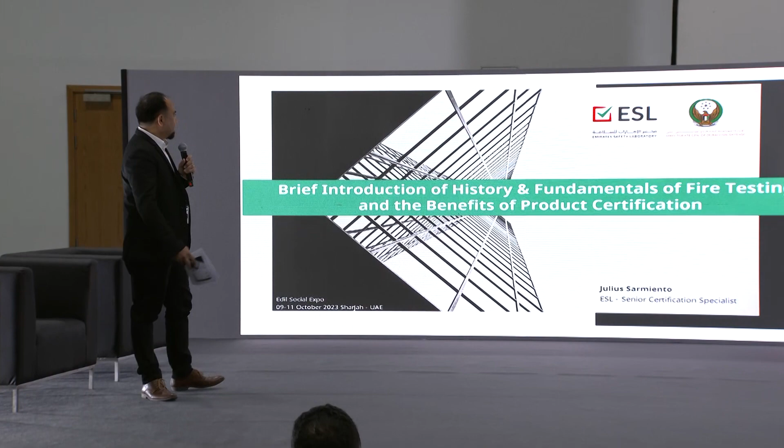So, my name is Julius Sarmiento. I am a senior certification specialist in ESL. I have over 18 years experience in the building industry, especially in the construction industries, and 5 years of which I work in the fire and life safety sector, and I'm now 4 years running in certification in ESL. So today I will speak about a brief introduction of the history and fundamentals of fire testing and the benefits of product certification.

So what is fire? Okay. I hope that it's okay that I'll just read some of my notes because it's more informative, yeah?

So all of us here have first-hand experience with fire. In our everyday life, fire is always there, like for cooking, for production of energy, as well as in the manufacturing industries. Fire is the process of combustion when the four elements of fire are present, and that makes a chemical chain reaction.

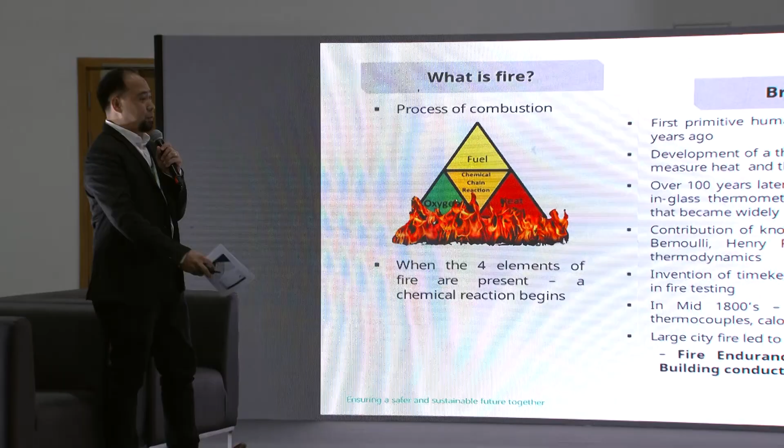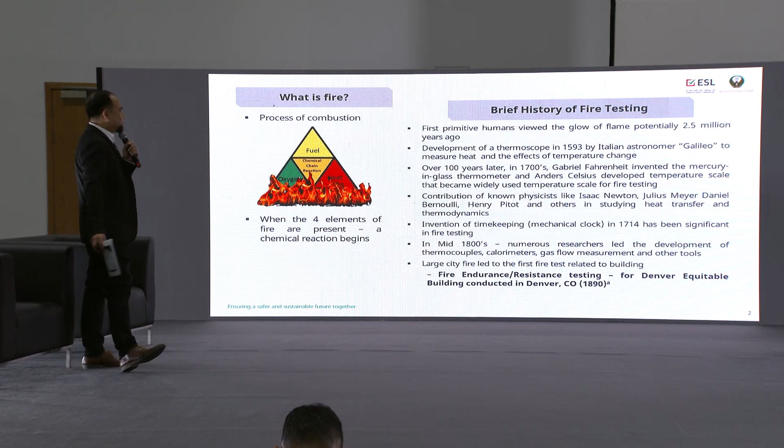So let's just have a brief history of fire testing. The first primitive humans viewed the glow of flame potentially 2.5 million years ago. But even before that, there's evidence of fires caused by lightning and the heat of the sun. The development of the thermoscope in 1593 by Italian astronomer Galileo is the main significant change, when he invented this to measure heat and the effects of temperature change.

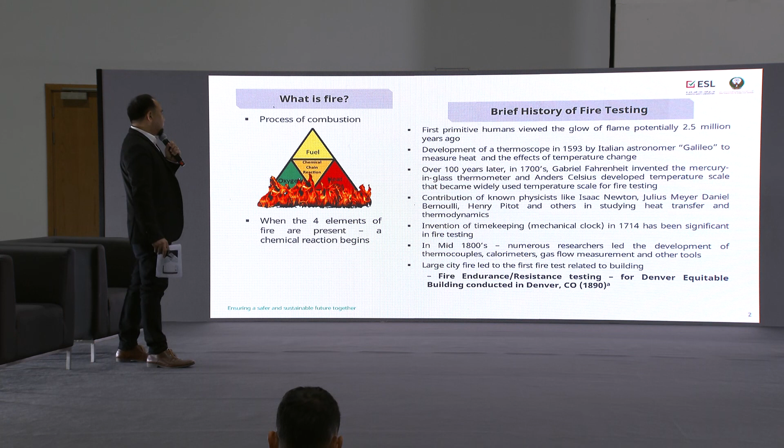And over 100 years later, in 1700, Gabriel Fahrenheit and Anders Celsius developed temperature scales that became widely used for temperature measurement for fire testing. And the contributions of known scientists like Isaac Newton, Bernoulli, Pitot, and others who studied heat transfer and thermodynamics became a significant factor in measurement and tools development.

And in North America, large city fires led to the first fire tests related to buildings. The first fire test happened in Denver, Colorado, which involved fire, load, and shock and water testing.

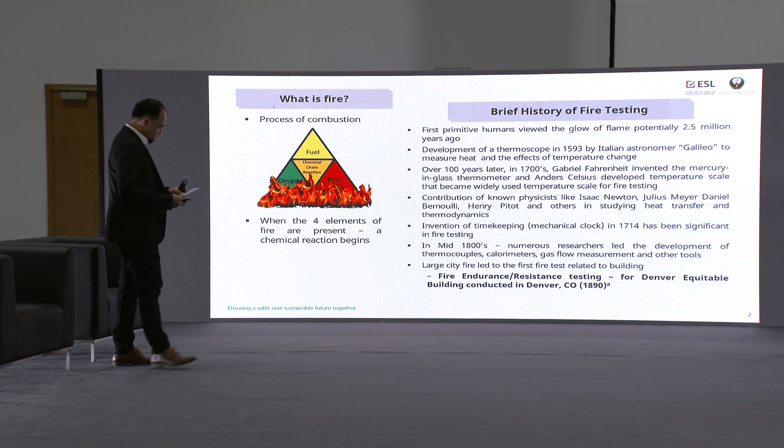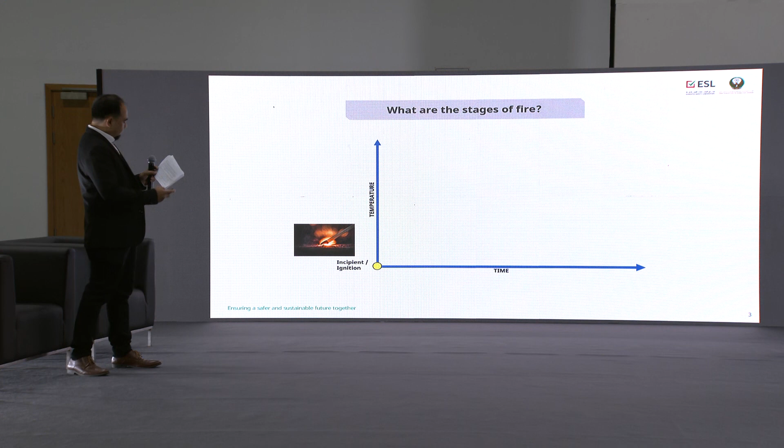So when we talk about fire breakouts, it should be understood that fire progresses in several stages. It starts with the ignition, or the incipient stage of the fire. This happens when the combination of oxygen, fuel, heat, and chemical chain reaction happens. The next stage is the pre-flashover, or the growth, where the process of combustion continues growing and more combustible material contributes to the fire load, making the fire increase rapidly.

Next is the flashover. This flashover happens when the temperature reaches 600 degrees Celsius. This is when it is advisable that there should be evacuation, because no one survives flashover. So the next one is the fully developed or post-flashover stage. This is when the fire has already reached its maximum and there's no more to burn. So it's the largest and it reaches over 1,200 degrees Celsius, which is very catastrophic.

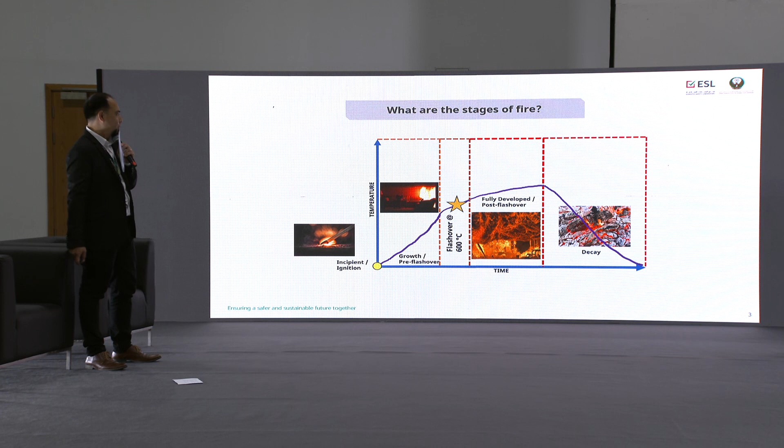And the last is the decay. Decay is when it's completely burned and there's nothing left in the combustible material to be combusted or to burn.

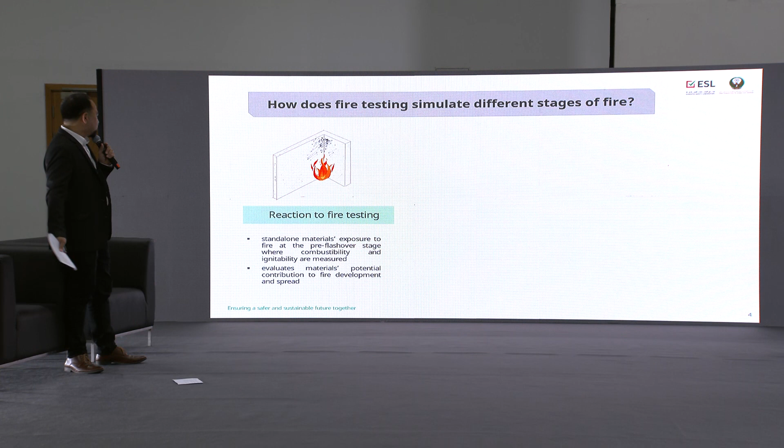So how does fire testing simulate different stages of fire? Reaction to fire testing. This is the standalone material fire testing. So basically, products are tested as a standalone in an exposure which is equivalent to the pre-flashover stage, where the combustibility and ignitability are measured. It also evaluates the material's potential contribution to fire development.

When a fire reaches the fully developed or post-flashover stage, it is important that building elements such as walls, columns, beams, floors, and other non-structural or structural elements of the building be tested for their capability to resist fire and prevent fire spread.

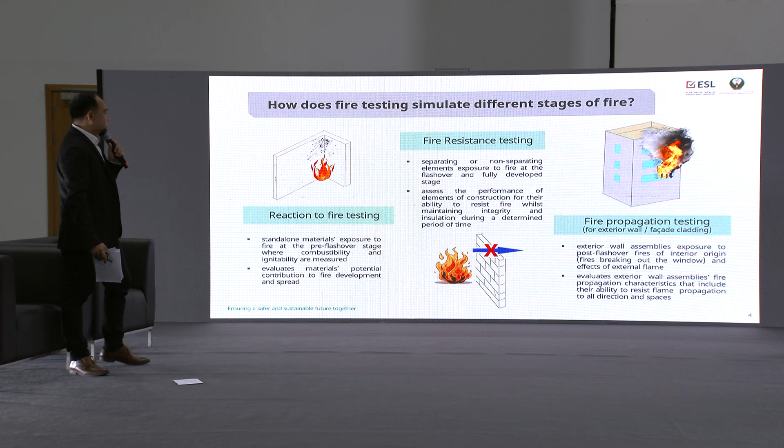Next is the fire propagation test. So this actually applies to exterior wall facade cladding. It's mainly the exposure to post-flashover fires of interior origin. So it's like the fires breaking out of the window and the effects of external flame. So it evaluates external wall assemblies' fire propagation characteristics, including their ability to resist flame propagation.

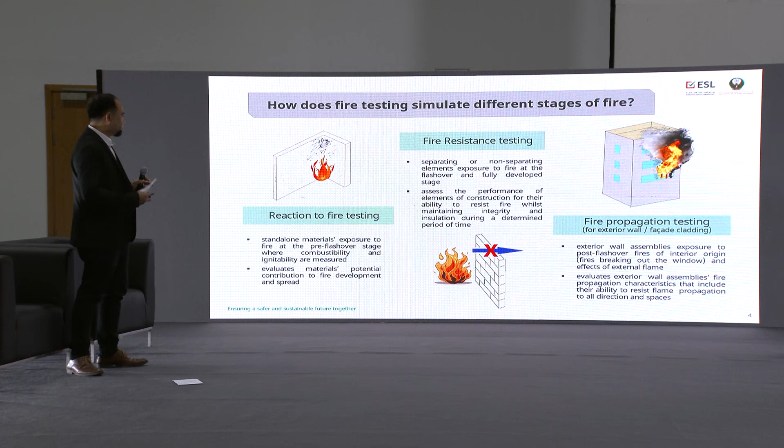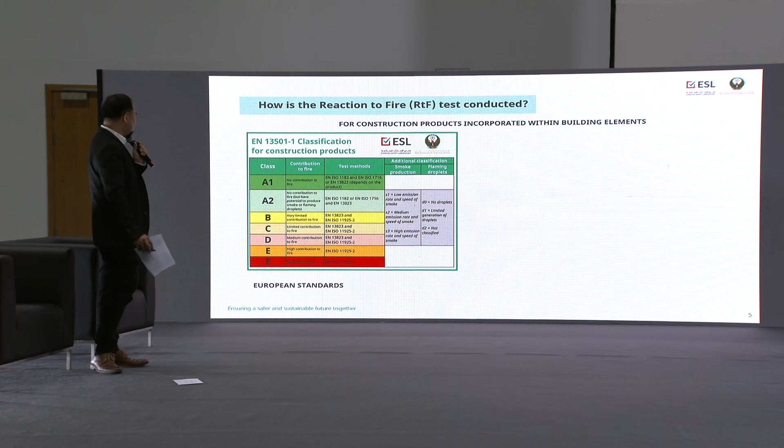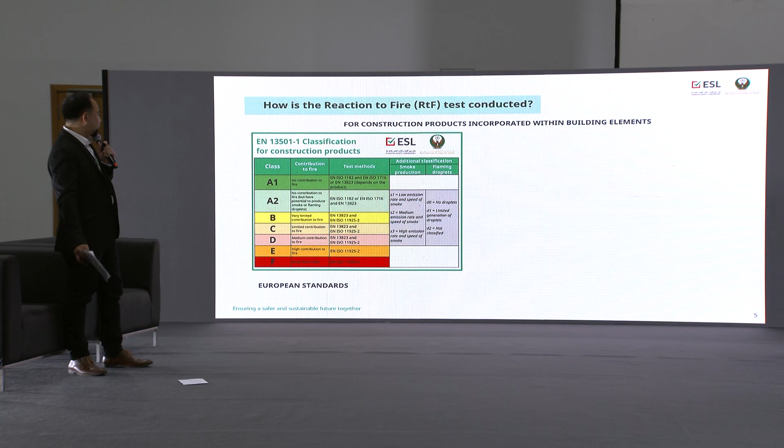So how is the reaction to fire test conducted? So the most common method is EN 13501-1, the European standard, which classifies a product based on the tests it has gone through. So in EN 13501-1 there are test methods that are followed.

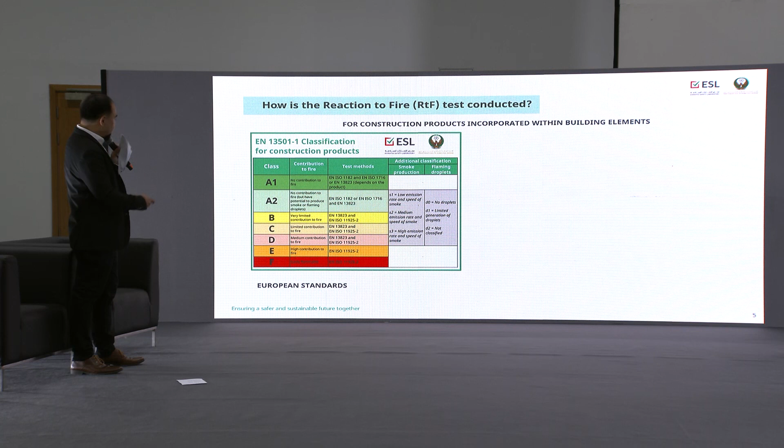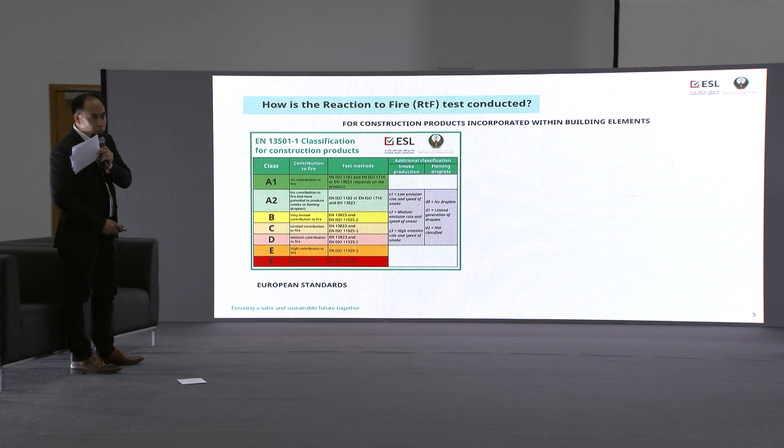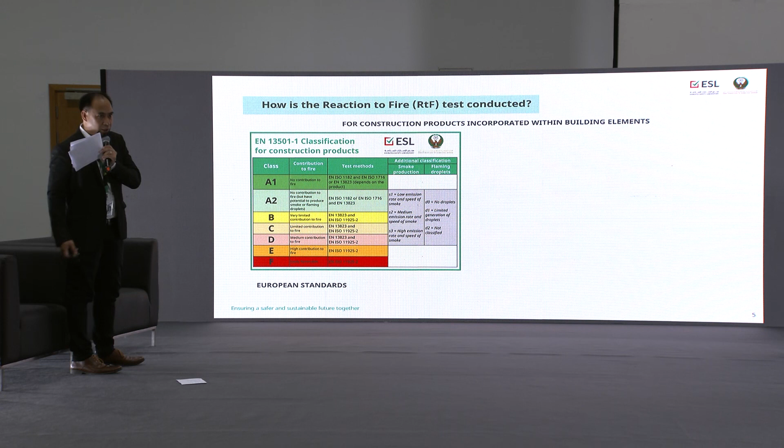But as you can see in the table, construction products are classified into each type of class. From A1, which is what we can say the best class, which is non-combustible, up to F, which is the worst class, which is easily able to spread flame or to contribute to fire.

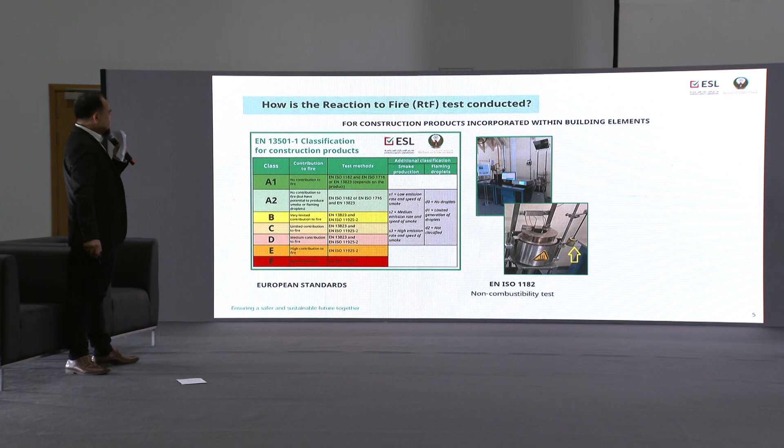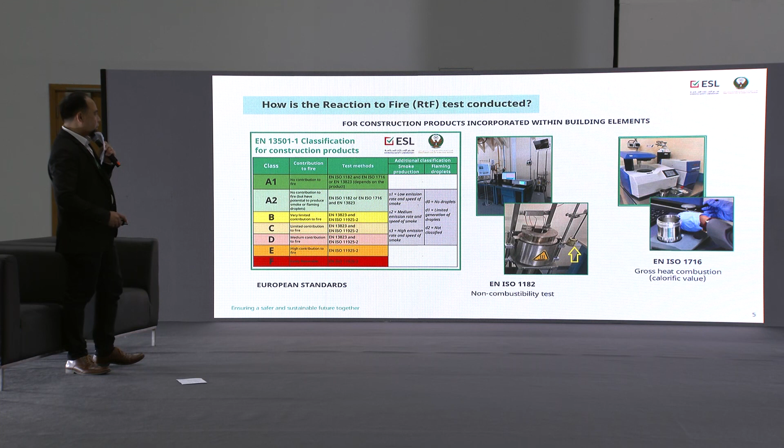So next, as I said earlier, for this standard, EN 13501, there are test standards that are used to test the product material. First is EN ISO 1182, which is the non-combustibility test. So in this test, a representative sample reduced to a size of 45 mm diameter and 50 mm thick is inserted in a furnace and then exposed to a 750 degrees Celsius temperature.

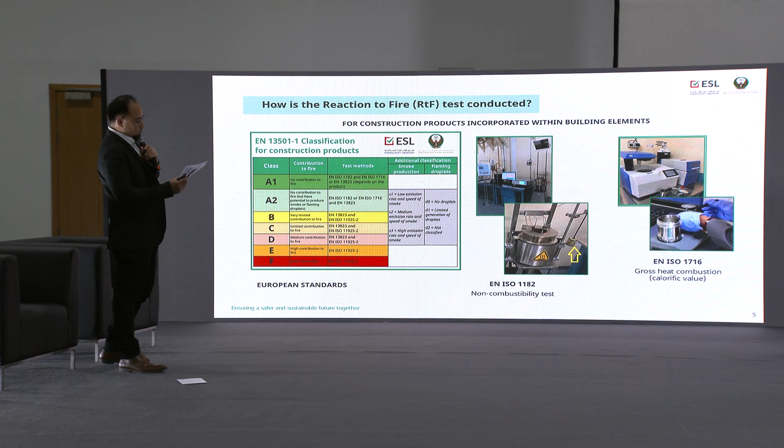The next is EN ISO 1716. This is known as the bomb calorimeter, where a specified mass of product is placed in an apparatus, which determines the gross heat of combustion, or the calorific value, of the material.

Next is EN ISO 11925-2. So basically this kind of test is a small ignitability test. It's like a lighter that exposes the product inside this enclosure, and it measures its ignitability with flaming droplets.

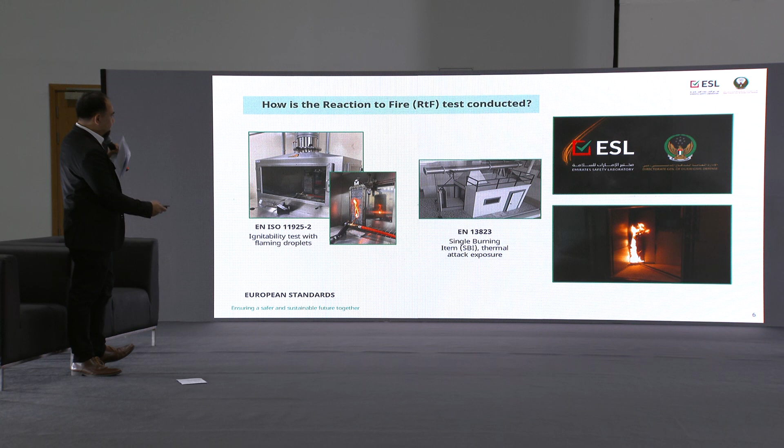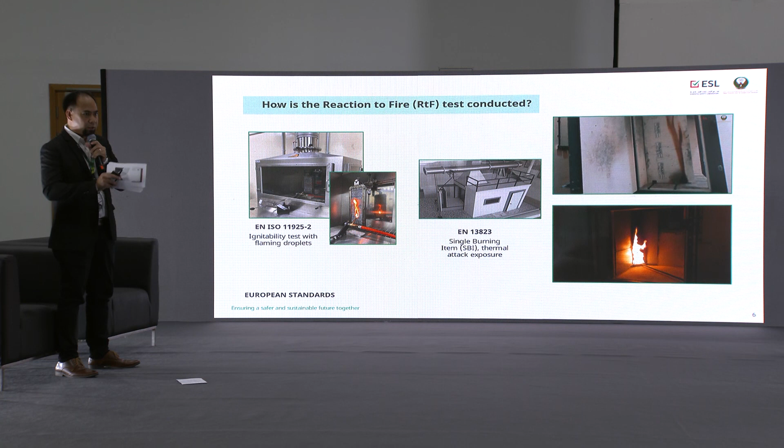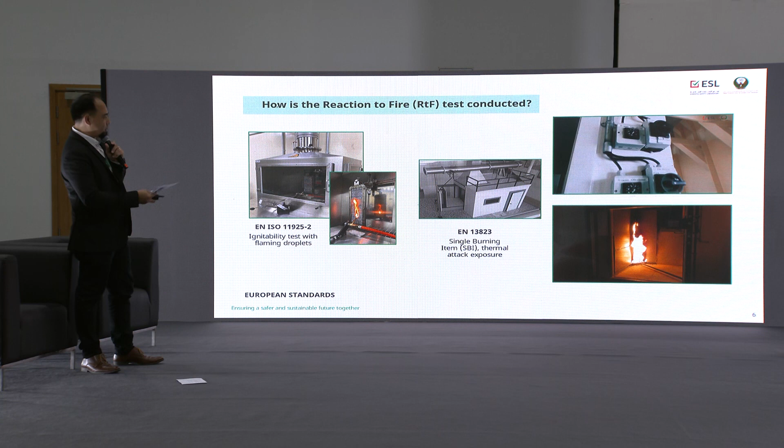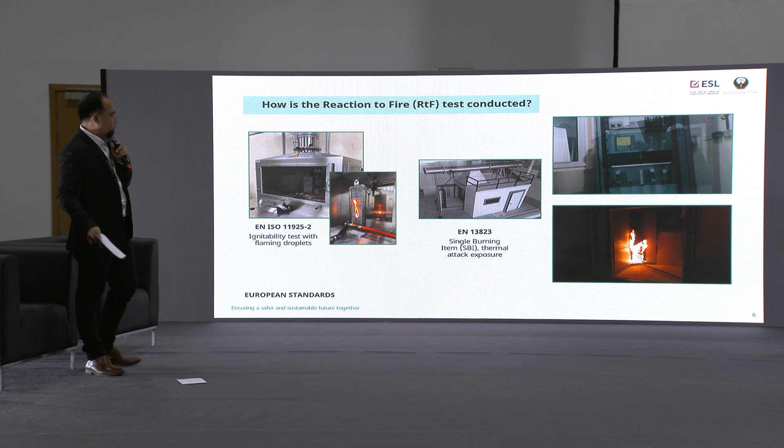The next is the EN 13823, also known as single burning item. As you can see from the video on the right side, this is how it is tested. It's like a room fire that is used to test and check the flame spread and also the smoke production of the product, especially for interior materials like wall finishing and ceiling finishing. It is also used for products used for facade cladding, like aluminum composite panels and other materials.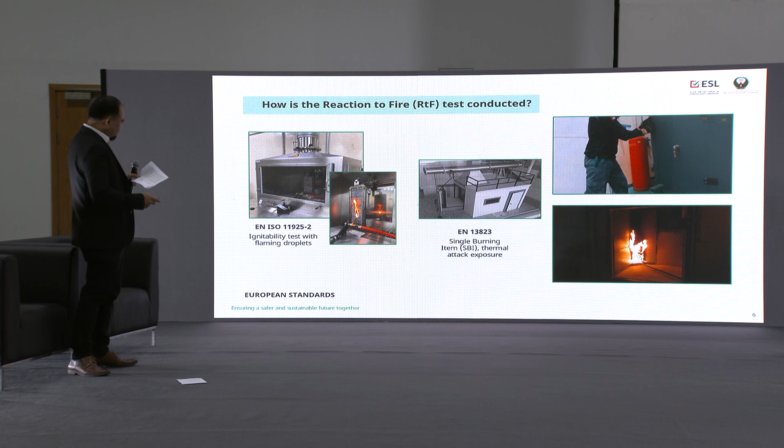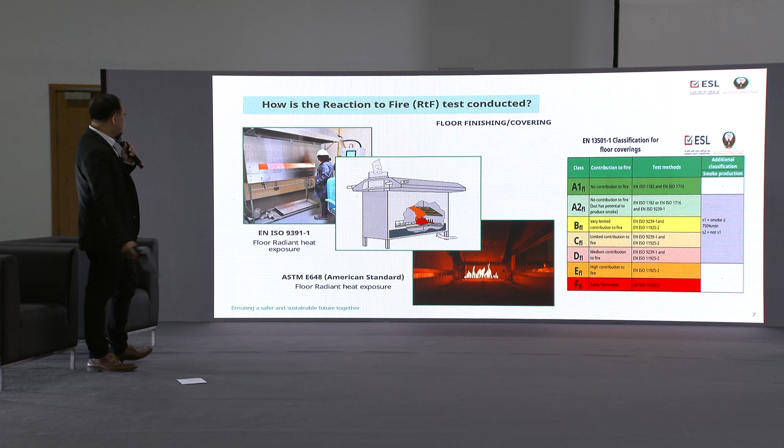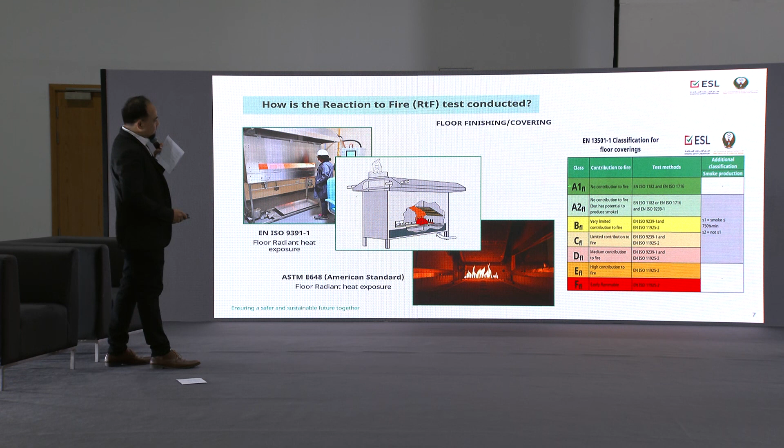Next is the EN ISO 9391, or I have to correct myself, it is 9239. This floor radiant heat exposure is usually used for floor finishing products. It is the test used to expose floor-mounted products, especially carpets, vinyl or other types of material used in flooring. It also measures the flame spread as well as the smoke production. Similarly, it is also under EN 13501-1. However, the classes are appended with FL, meaning it is for floor use.

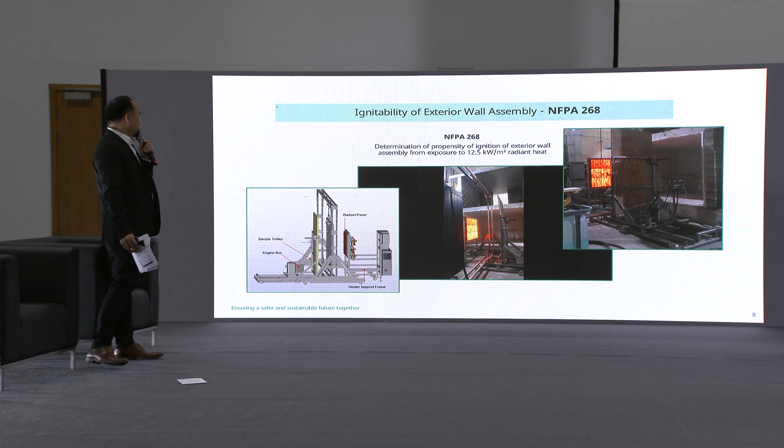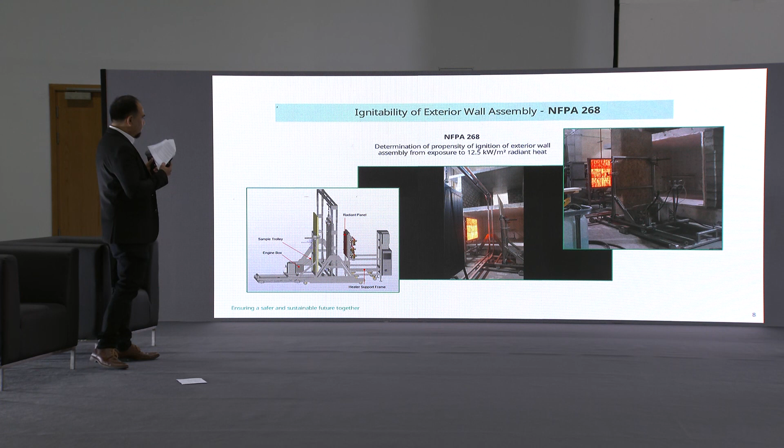Next is NFPA 268. This is the ignitability of exterior wall assemblies, to determine the propensity of ignition of an exterior wall assembly from exposure to 12.5 kilowatts per square meter radiant heat. Basically, it resembles the situation when there is a fire in a nearby building, and how an exterior wall assembly would perform under the radiant heat of the external fire. You can see in the video how the test is conducted: this is the product and this is the radiant heat, as you can also see in the image on the right.

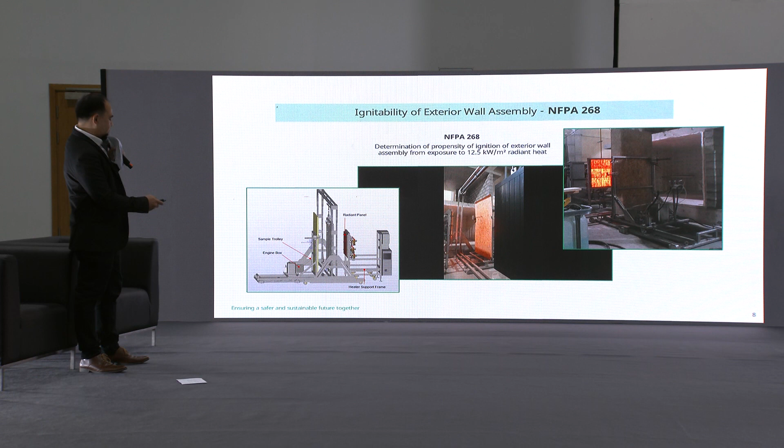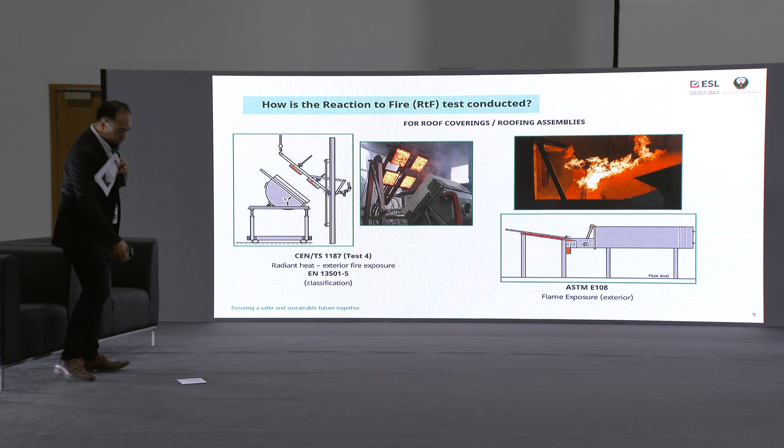Next is roof coverings and roofing assemblies. This type of testing is used for roofing materials like sandwich panels, shingles, or even solar panels used on the roof covering. CEN/TS 1187 is the European test method used for testing roofing materials. It has 4 types of tests, test 1 to test 4, but test 4, which is radiant heat and burning brand, is the one recognized by the UAE Fire and Life Safety Code for testing roof covering products. In the American standard, the counterpart is ASTM E108. The roofing material is exposed to flame as well as wind, and the flame spread of the product is measured.

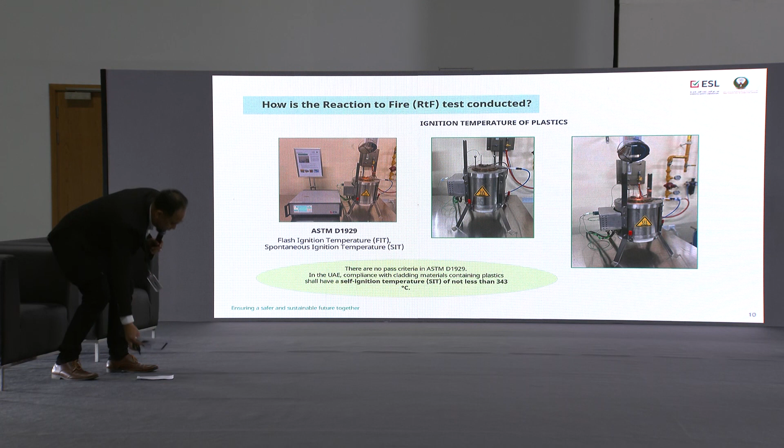Next is ASTM D1929. This is a test for materials that contain plastic. It tests the flash ignition temperature and spontaneous ignition temperature. There is actually no pass criteria in ASTM D1929. However, what the UAE Fire and Life Safety Code considers for compliance of cladding material is that it should not ignite at a temperature of 343 degrees Celsius or lower. This test measures the temperature at which the material with plastic will ignite, and whether it reaches the acceptable temperature.

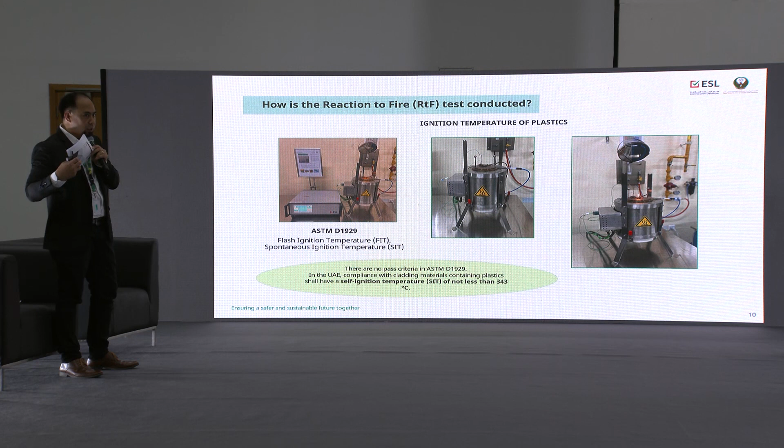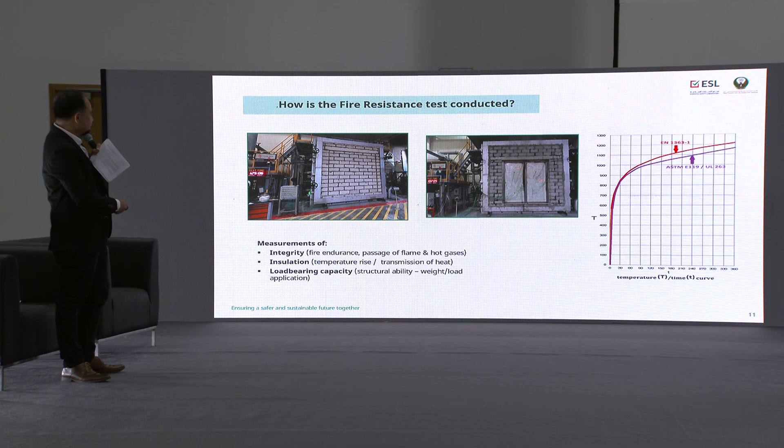What you can see from the outside is the unexposed side; what is tested is behind it. Behind it is the furnace producing over 1,200 degrees Celsius, as well as pressure inside, depicting a room fire. Not only walls, floors, beams or columns are tested for fire resistance. Other services like fire-rated ducts and systems like penetration seals and linear joint seals and sealants are also tested, for their integrity, insulation, and, where required for beams, columns and floors, load-bearing capacity.

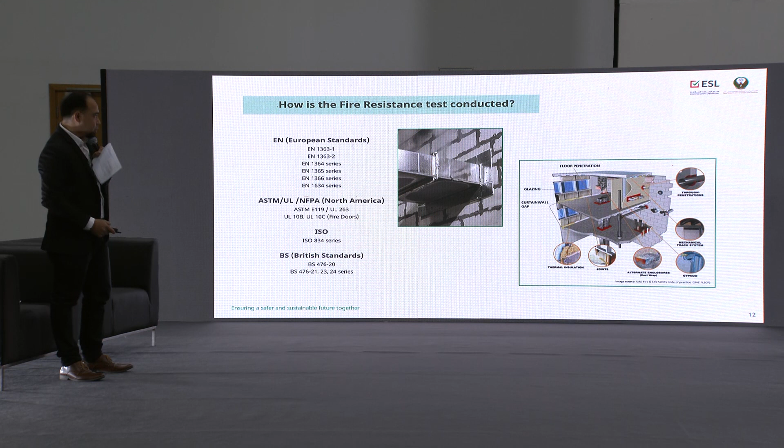So next is the fire propagation test. How is it conducted? This test is for evaluation of fire propagation characteristics of exterior wall assemblies, basically for the cladding materials or cladding systems used for buildings, like aluminum composite panel, GRC or glass reinforced concrete, and EIFS and other types of combustible cladding systems.

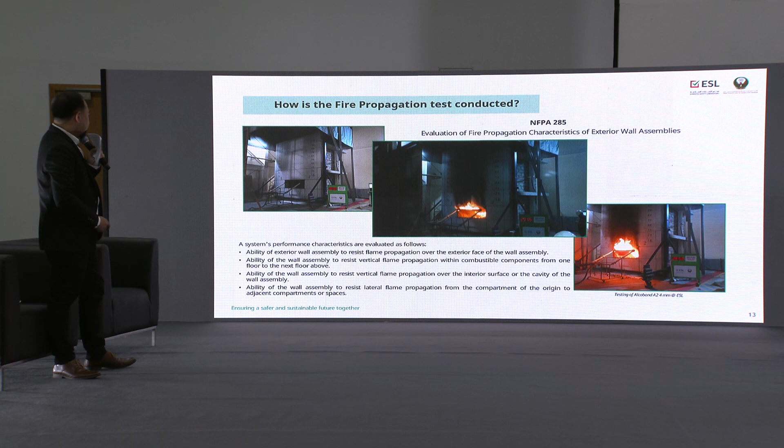So what you can see from the video is a sample test of fire propagation test in our laboratory. The sample material here is the ACP, which has a classification of A2 in EN 13501-1. This type of assembly, which is around 18 feet high and 13 feet width, is tested and evaluated for the ability of the exterior wall to resist flame propagation over the exterior wall, as well as ability to resist lateral and vertical flame propagation in the interior and in the cavity of the exterior wall assemblies.

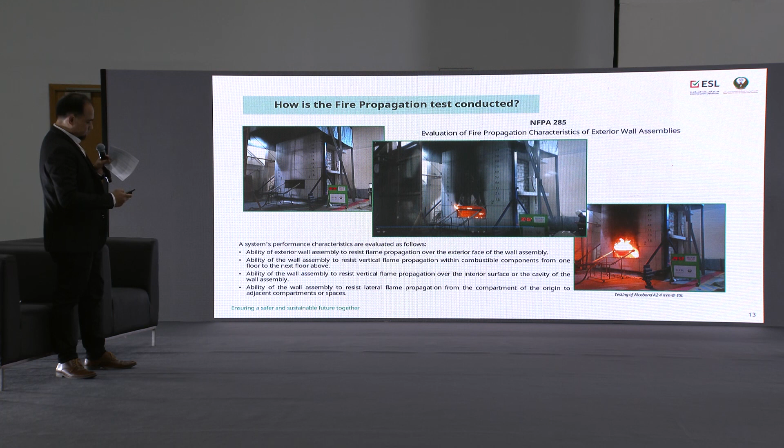So what is product certification and how important is it? We discussed a while ago about the fire testing that is required for building products and building systems, like different systems from the inside, like floors, walls, beams, and also for external building construction elements like facade cladding, roofing, even solar panels and other construction materials that are necessary to be tested, so as to avoid or prevent more fire load when there's a fire. So this is basically the aim of fire testing.

But what is product certification? The aim of product certification is to have confidence in the production of materials, especially when the quality management or quality procedures are being checked during product certification. Next is the consistency of the product manufactured as compared to the tested material. And lastly is the impartiality, which is ensured during the process of certification.

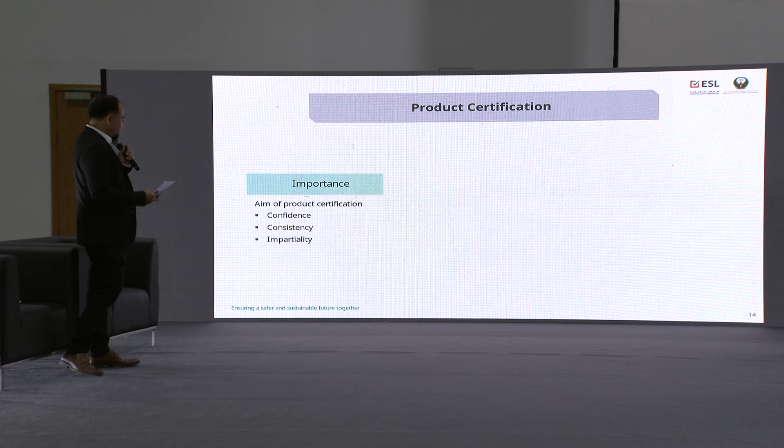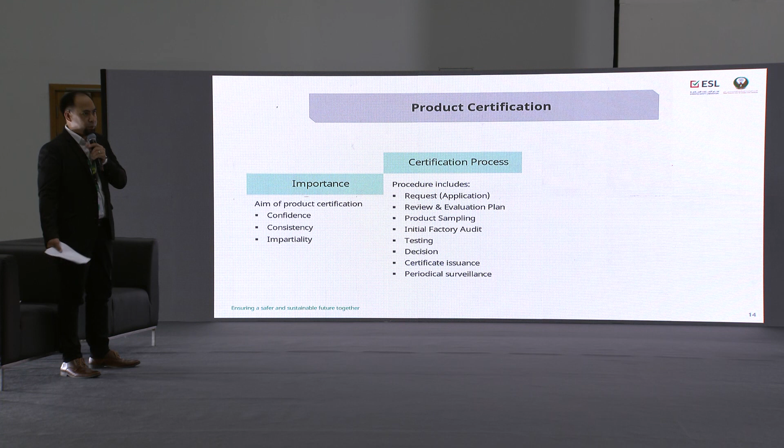Next is the certification process. Basically, the certification process is an intensive process. However, it's so sustainable that it helps more manufacturers to have value in their products that are being marketed not only in the UAE or GCC but the whole world.

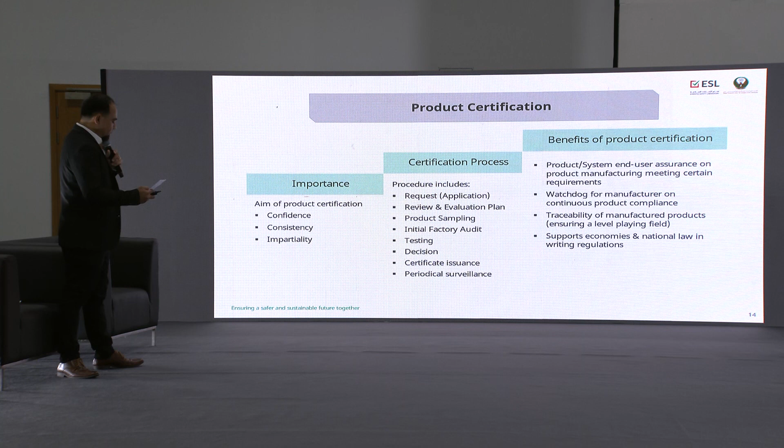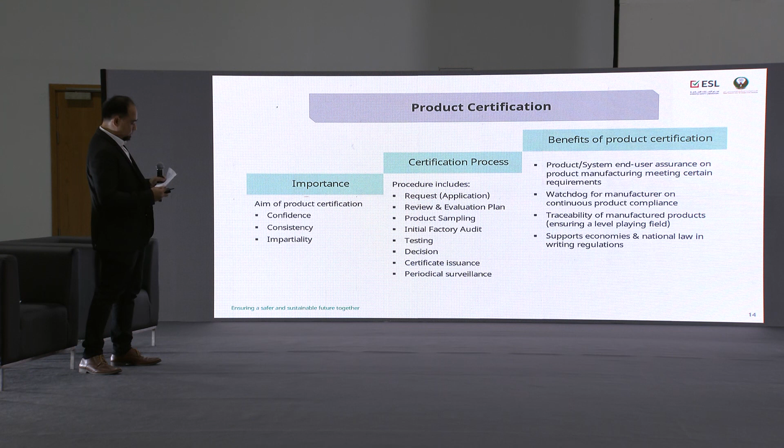Next is how the certification process happens. First is the request. We receive the application from the manufacturer or from the local partners of the manufacturer, or from the traders, or from the agents of the product.

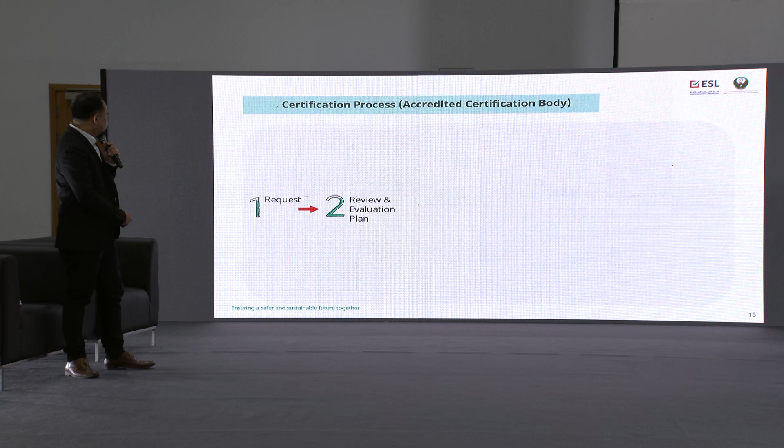Then there's a review and evaluation of the documents submitted. For example, for one product that wants testing and certification, we evaluate it in a sense of what end use it will be used for, and also what market is the target for the manufacturer to enter in different regions.

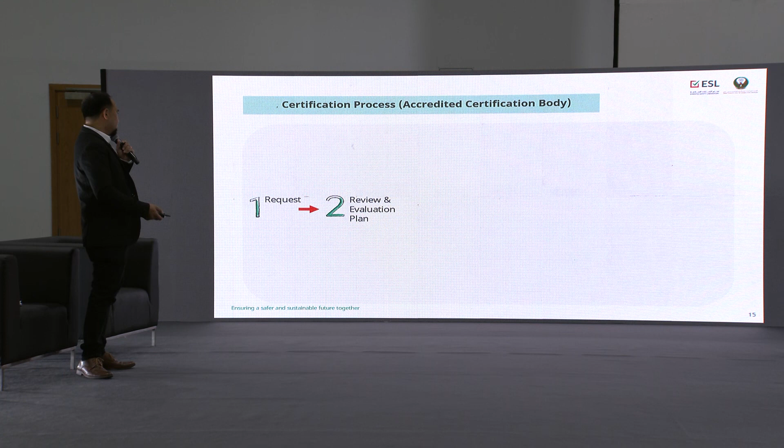After the review and evaluation plan, there is sampling conducted for the product representative that will be used for the fire testing. It is mandatory to have the sampling, so there will be proper traceability of the products that will be tested in the testing laboratory.

And also there's an initial factory audit. This is what I was saying earlier about the benefits of having product certification. That initial factory audit is basically the way for the certification body to check on the manufacturer's credibility, as well as their quality, and how they do the quality procedures for their product manufacturing.

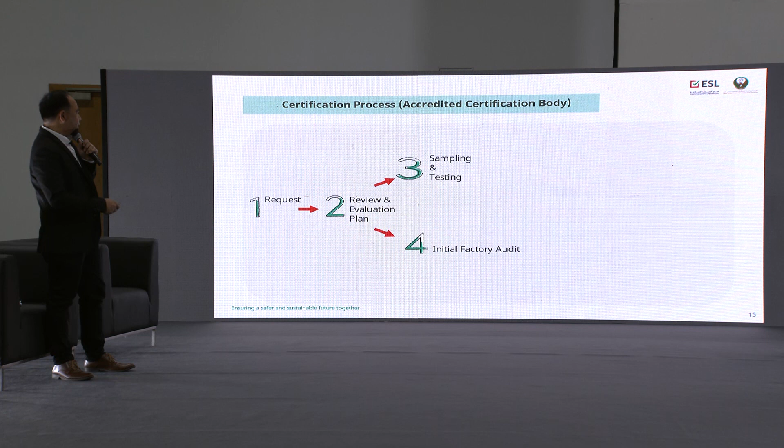So after the testing and initial factory audit is completed, there is a decision made. Of course, if the fire testing is positive and also the factory audit is successful, the certificate will be issued.

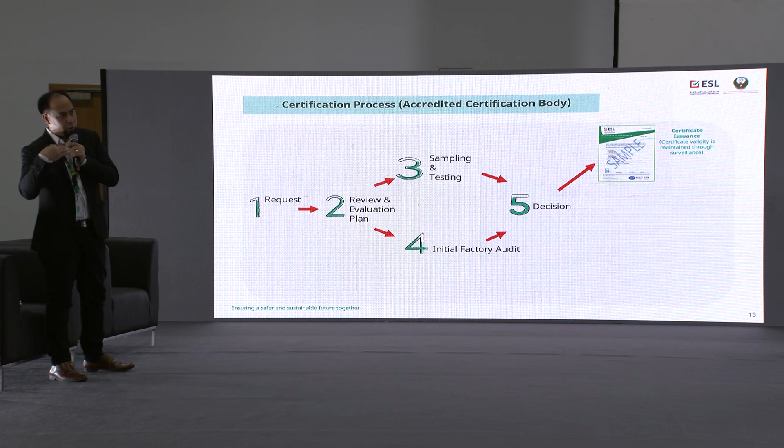Once the certificate is issued, there will be surveillance or a supervision agreement that the certification body gives to the certified manufacturer, because this is how we maintain their certificate validity. If they will not be maintaining the type of quality, the type of product that they are producing as compared to what is tested, then there's room to withdraw the certificate.

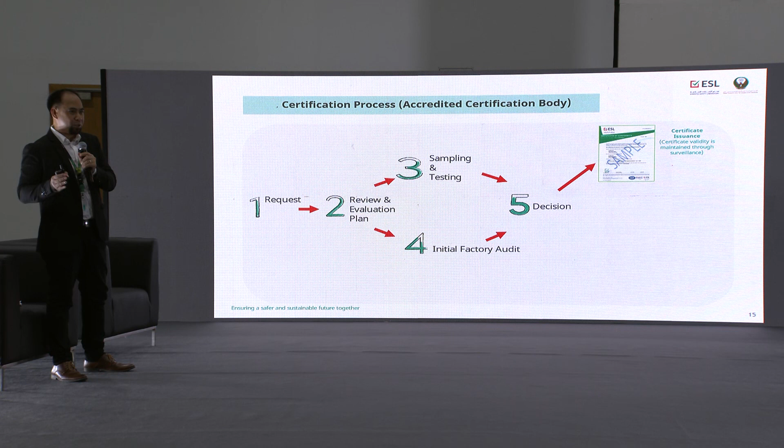That's why certification is not only about testing it and then making it certified and finished. No, certification is continuous consistency of the product manufactured.

And in the UAE, after the certificate is issued, every Emirate or every civil defense of Emirates requires the product to be listed so that they can market it in the UAE. So what you can see on the right side is what you call Certificate of Compliance, or UAE COC, which is produced by the certification body who made the certificate issuance.

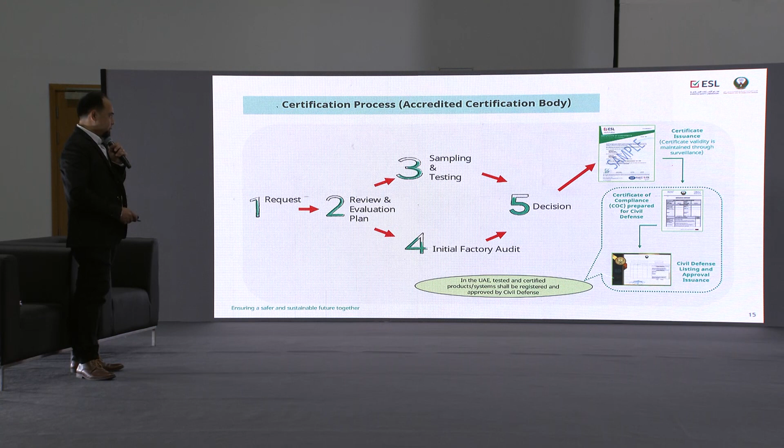However, these are the prerequisites to be used for a civil defense listing. So what you can see is a sample of certificate listing from one emirate. So this is how the UAE product approval or product listing happens.